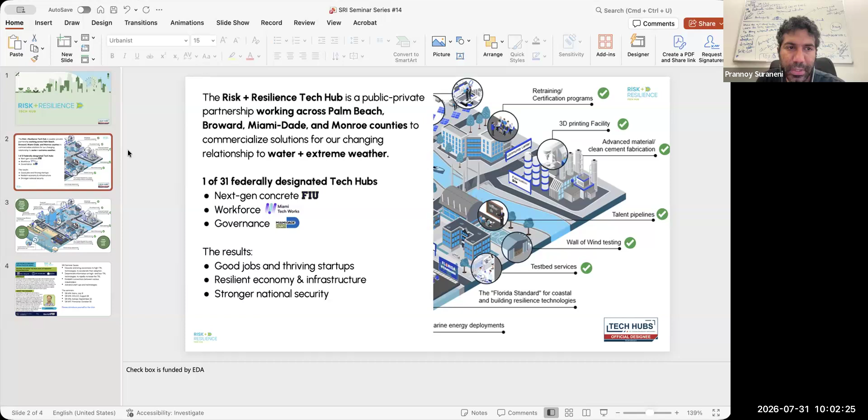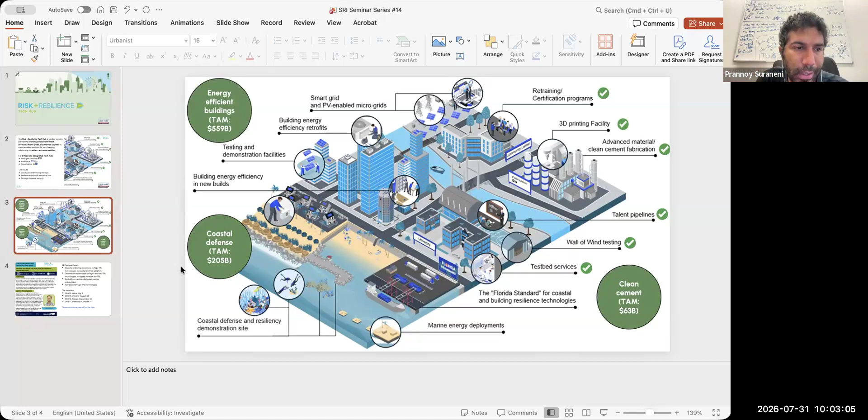While the majority of the research that is funded does focus on coastal defense and concrete materials, energy efficient buildings is also of interest. And ultimately, we aren't just interested in a few points here and there. We're interested in the entire water, offshore, inland picture, with a number of different things related to energy, workforce, 3D printing, novel concretes, clean concretes, and testing materials for hurricanes. All of those things are of interest in developing our technologies. What you're seeing here, the Sustainable and Resilient Infrastructure series, is just one small part of this entire piece.

The objective of this seminar series is really to make these connections happen. We want the startups to talk to companies, to industry, to VC, to government, etc. We want to educate and bring awareness to high TRL technologies to accelerate their adoption. We want to disseminate information on both high and low TRL technologies to increase the TRL. And we want to establish connections between the various stakeholders. That's the most important part of these connections that we will be establishing. Through that, we aim to advance the startups and technologies that are primarily in South Florida. And for those who are not in South Florida, we hope they will come to South Florida because of all the nice things that we are doing.

Today's talk is going to be given by Leonard Nelson from Natrx. The title is Inviting Water In, the New Logic of Resilient Infrastructure. I'm going to let him introduce himself, apart from saying that he's obviously extremely well established, well accomplished, and he's going to do a fantastic job.

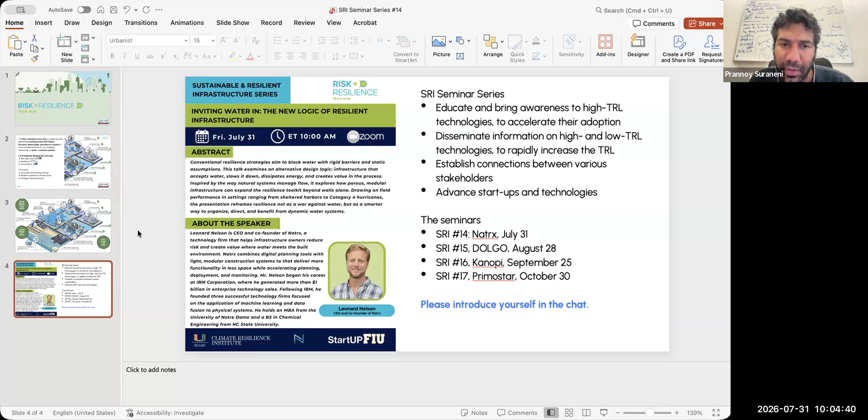Excellent. Well, Prannoy, thank you so much. And I wore the same shirt when I was getting ready this morning. I picked the same shirt as my bio photo, so truth in advertising there.

Really excited to just get a chance to get to know all of you. We're really excited to share a little bit about our journey, what we've learned in this field, dig into the problem, and talk about how we can use natural systems and technology to solve the problems that we have in the resilient space.

So I'll go ahead and share my screen. And speaking of technology, I'm going to try a new format here presenting. Can everybody see the screen? Yes, excellent. So just a quick snapshot of us before we jump in and get started. Let me minimize this screen here.

So Natrx, we provide technology. We help to activate projects and communities at the interface between the natural world and the built environment. We're very passionate about helping our clients achieve functional, economic, and environmental benefits at the places they work. The problems are pretty hard. It really is a daunting challenge to even define resilience in the first place and deliver solutions consistently. Doing more with less is kind of a theme in our world, so we'll talk a bit about that. And then we'll talk about how we can use technology to get smarter together as a community. So just a snapshot of our firm: we have about 20 employees.

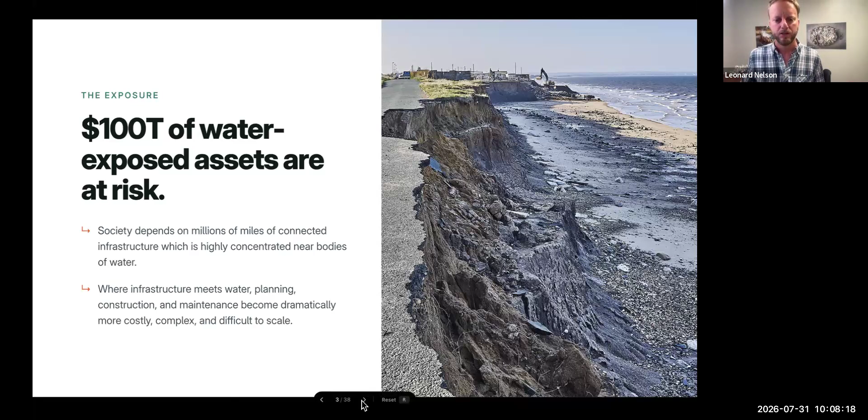And things kind of get very manual, get very slow, progress gets a lot more expensive. And unfortunately that is exactly the location where the consequences are the most extreme, right? Economic consequences, even loss of life. So these are major challenges that are really difficult to deal with. And we look at a number like 100 trillion, it's just a massive number. So how do we be smart about how to manage it?

So unfortunately, the way we build today is just not working. We use a lot of impervious techniques with bulk materials. That's 99% of what's being done out there. There's a few technology firms in this world, but most of what's happening at the water's edge is traditional construction - very costly, very labor intensive, oftentimes environmentally damaging. And what we're fundamentally trying to do oftentimes is block water out, which only speeds it up and sometimes makes those problems worse.

And when you look at the scale of infrastructure in the United States, there's at least 11 million linear miles of infrastructure that's directly exposed to the water. And cost for protecting, retrofitting, upfitting, building new is in the range - it always depends, of course - but it can be $50 million a mile or more. So it's a challenging place to work.

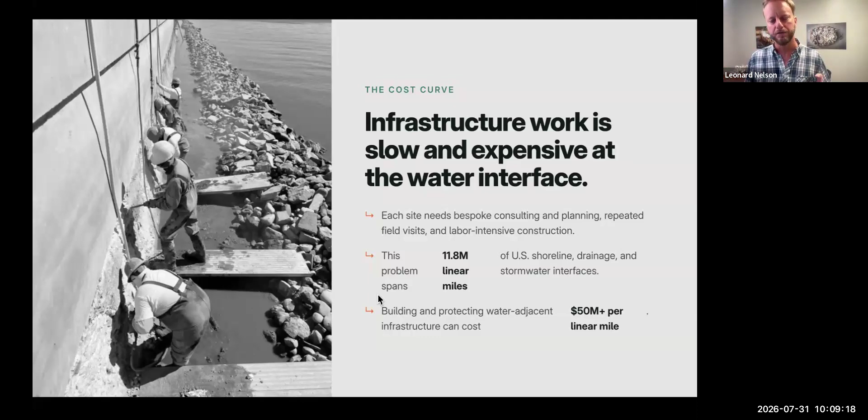Very, very manual today - a lot of manual design, a lot of manual bulk material manipulation. And so the flip side of that is there's a lot of opportunity to use technology to be smarter. So when you kind of look at it, who's our customer, whose problem is this?

That's another challenge in this world, in that it's actually a lot of people's problems, right? So you typically have an asset owner or a property owner. They have a lot of stakeholders. There may be other users on that property, particularly if it's public property. But even if it's private property, there's sometimes shared resources when you're touching the water. There's a policy, environmental, and regulatory angle. There's practitioners that need to be able to work in that area, work through those regulations, get things done.

And so really this is a shared challenge, a shared problem. At our firm, we look at our customer and who we serve as individuals that are trying to do more with less - those are typically the asset owners and the practitioners working together, incorporating input from stakeholders, the general public, and the environment. We're also trying to ride the wave of new technologies and new suppliers. Titan gave a great presentation, Eric Kohler, a few months ago. So there's a lot of materials innovation, but we can't bring those to practice unless we change a lot of other elements about how we build.

So, a kind of simple question about resilience that people often ask is, why don't you just put more stuff out there? Why don't we just build bigger?

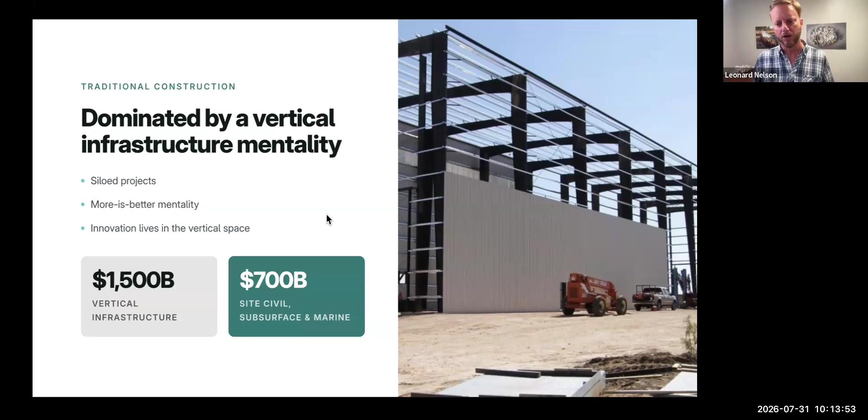But we're the little sibling here, and a lot of the ways things are done are based on how you build buildings, not how you deal with water, wind, or resilience threats—and unfortunately those resilience threats don't play by those rules.

There are also fundamental constraints in how we build and what we're able to do. Things are getting more expensive, not less. So there's almost always more work that needs to be done and more assets to protect than there is funding to do it. When you look at the labor market and supply chain, that's equally true.

That's twice as much as the entire cloud computing market in total revenues—Salesforce.com and every single one of the tens of thousands of software-as-a-service companies combined. We're spending twice that much as a society just to keep excavators operating every year.

40% of excavator drivers are going to retire in the next 10 years. And as we build data centers, we're not able to keep up with the demand for just excavators and those crews alone.

The same is true on the supply chain side. We've only built 2 to 3 cement plants in the last 10 to 15 years in the United States. We really need to be adding 2 a year just to keep pace with supply. We're not creating a lot of new mines, new materials in the plants, new quarries. We have a fundamental supply constraint on our supply chain, and that's driving costs up and making things more difficult to build with traditional materials.

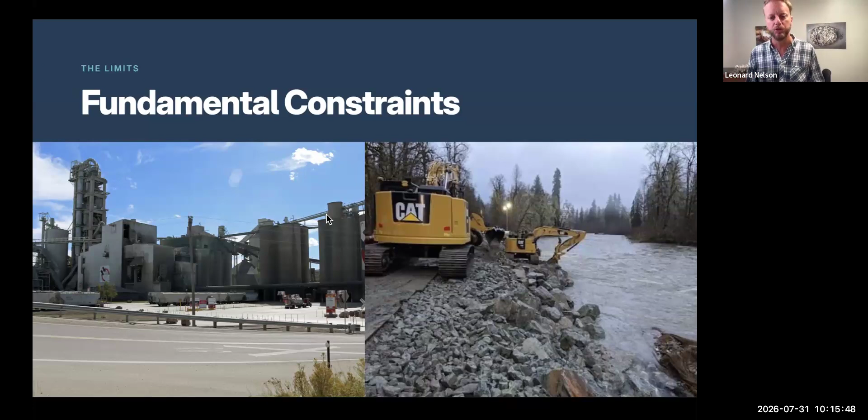So again, it begs the question: how do we do more with less? How do we get smarter?

Last thing I'll mention is innovation is not non-existent, but I think it's progressing slowly and it's relatively minimal in the subsurface domain, in the water resources domain. So there's a lot of opportunity to incorporate technology, incorporate that line of thinking. But it's also challenging, right? It's very difficult to introduce that. Part of that is because we all know in this space that our toolkit and the tools for the job...

...are a little bit too narrow, but the individual incentives, both for contractors and for project owners, really incentivize people to tend towards a traditional approach, right?

So there's a bit of a challenge here. We have a lot of empathy for the practitioners in the field that we work with, in that you're not going to get blamed if you go with a traditional approach. But if you go with something newer without doing the math and without doing the work, and if you can't justify it, that's a little bit more threatening, a little bit more scary.

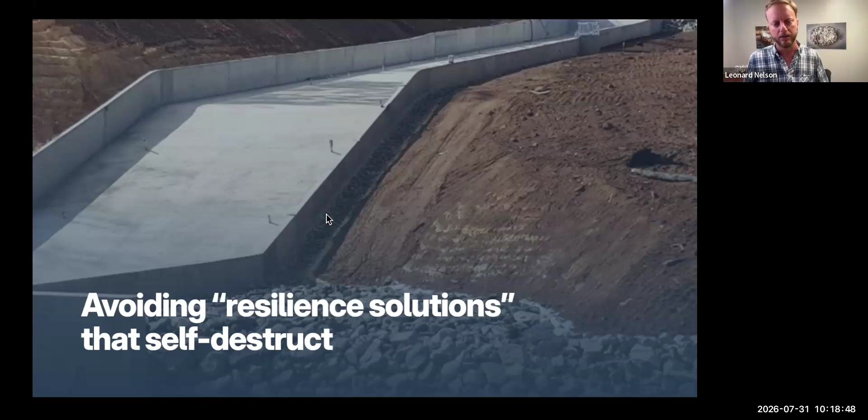As we learn and share together, we really need to think about ways that we can avoid solutions that are designed like this that self-destruct on their own and reduce in value over time, right? This is much more of a liability than it is an actual asset.

So how can we use technology and natural systems to help us build smarter? At Natrx, we believe it's really critical to take lessons from nature. Some people say nature is the world's greatest computer, right? The computational power of all the billions of natural organisms and systems interacting with water and with all types of resilience threats over hundreds of millions and billions of years is really unmatched by anything that humans have done.

When you look at how natural systems form in water-exposed areas, what you see is a lot of complexity. You see geometries that are irregular. You see situations where coral reefs, oyster reefs, the Amazon rainforest, water is allowed to flow, but it's slowed down.

We believe very strongly we can take lessons from nature, incorporate biomimicry to leapfrog what we've been doing since the 1900s, 1970s, the typical building methods we use today. How do we look at nature and then leapfrog what we're doing to get a factor of 10x better?

As you look at how nature manages water, it's very different than a wall. It's very different than something that's an impervious way of trying to block water out. It's distributing friction. There's voids and rugosity. It's a multi-species holistic habitat that also works with sediment, works with water.

It can build land. People often forget the entire coastal plain, everything from South Florida to, say, the entire—I live in North Carolina—everything east of Raleigh is built by these systems. There's no rock underneath the ground; it's built by the sedimentary plain. So this is oyster reefs and wetlands and trees working together to grab sediments, drop it in the ground, build off of it, and create very valuable real estate.

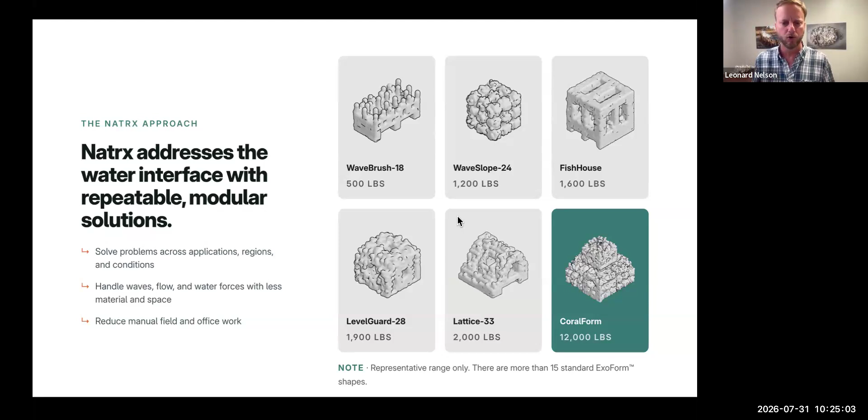So kind of the path forward, at Natrx, we strongly believe in modular solutions, moving away from bulk materials that are manually manipulated in the field to repeatable modular solutions. This is just a small snapshot of some of the different modules that we have, anywhere from 500 pounds to 12,000 pounds. We need to figure out ways that we can handle waves, flow, and water forces with less material and less space than rock or site cast concrete or precast concrete, avoiding smooth edges, finding ways to reduce water, and kind of move it from the regime of dangerous and destructive into a range where it creates value. And doing that while we're saving costs and reducing manual field work.

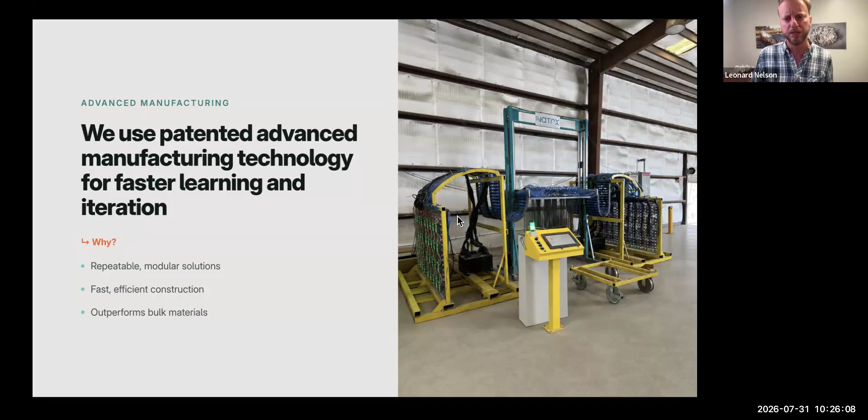Looking forward, we really want to make sure that we can move the inventory position of where and how we make these things closer and closer to the point of use. And so we're able to be a lot smarter about the supply chain to get people exactly what they want, where they need it, at the price that works for them for their budget. And again, these do a lot of things for the end user and the end user supply chain and existing contractor. So repeatable modular solutions, fast construction, less unit operations, that allows the end user to save money. It's less impact on the environment. And it helps people to move incrementally away from the bulk materials, which we use billions of tons of in the United States.

And then we have a software platform. So as we kind of move towards these modules, how do we help people to make these decisions? How do we use these new tools? How do you get started? Where do I start? What do I prioritize? What's my ROI for protecting something? What are the projects that I don't have to do this year that I might be able to avoid or defer? And what's my expected ROI for getting something done?

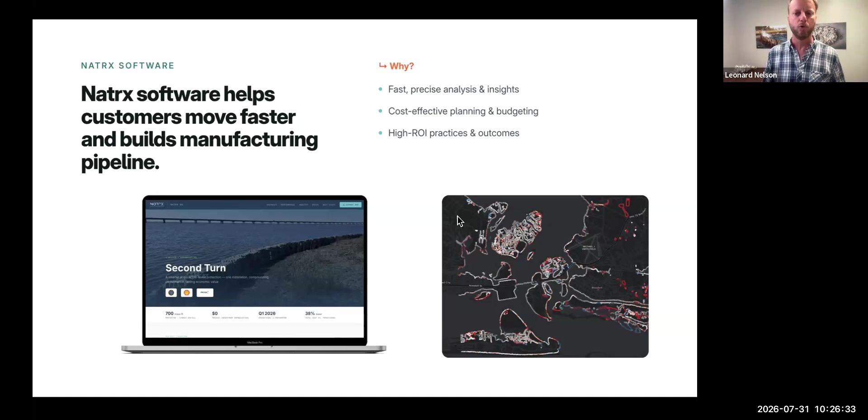And so kind of looking, I think, a little bit of a shift here towards iterating toward that optimal water interaction. So we shared that there's kind of ditches on two sides of the road. You can overprotect and overbuild, and that's generally, in our experience, what we see is that there's not enough funding to get things done, but oftentimes when funding is available, there's a lot of waste on the projects that do get done. There's a lot of overbuilding and there's a lot of incentives that kind of tend people towards that overbuilding tendency.

And so there's projects that are not being protected at all, very critical areas. They don't have the data to know that that should be prioritized potentially, or they don't have the funding. And then on the other side, there's areas where things are being overprotected or overbuilt. And the question is, how do we find that Goldilocks point towards the middle?

So we see projects where end users might do something like an oyster bag. Oyster bags are great techniques. A lot of us, including our team, got engaged in this world and got started by community-driven oyster bag projects. They can be great in the right environment, but we'll see customers put out oyster bags, they get blown away, blown to smithereens, and they go out and do it again. And so that's just simply too little to do the protective work that needs to be done for shoreline treatment, for example.

And then more commonly, you have something that's overbuilt, right? Heavy site civil where there's too much aggregate, too much material, and there's value destruction—even the upfront cost, the long-term liabilities, or the destruction of the resource itself. So finding that Goldilocks point is a real trick, and we believe we should be data-driven and data-informed as we make those decisions.

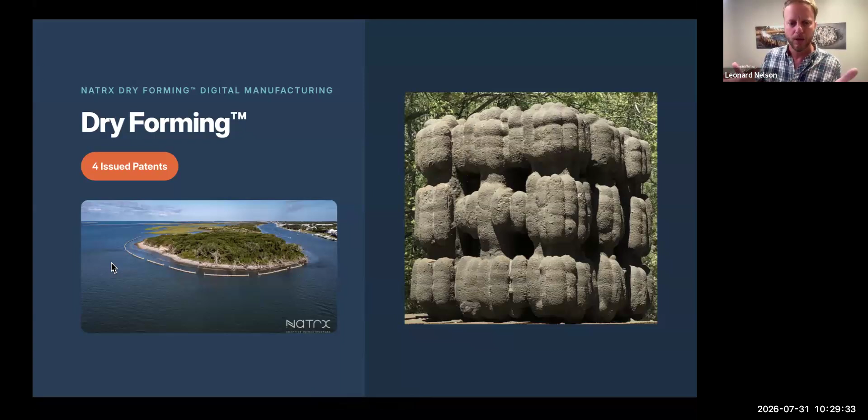On the left you can see Carrot Island, North Carolina. This is protecting a really important port and community, Morehead City, Beaufort. We're able to get that balance right—slowing the water down, slowing down that wave force, allowing the holistic natural system behind it, which has wild horses and all kinds of critical environmental systems. But that land mass and that sediment is really important to protect the town behind it. So we want smart geometries in place that allow storms and water to be exchanged in normal conditions. We want to slow that water down and let sediment drop and keep building up that island, like it's been building for thousands or millions of years.

We can actually put math to this. As we look at water speeds—and we'll talk about waves in a second—the value creation regime is really between 0 and 0.5 meters per second. If you can slow water down and invite it into your community, any waterfront property is going to have a lot higher value. It's enjoyable, there's all kinds of environmental benefits, and it adds to the economic base of the U.S. If you completely block it off, or your water's stagnant, you erode, reduce, or destroy a lot of the economic value you pay to live in that coastal zone for in the first place. So where you really want to be is where water's moving in this slow, value-creating regime.

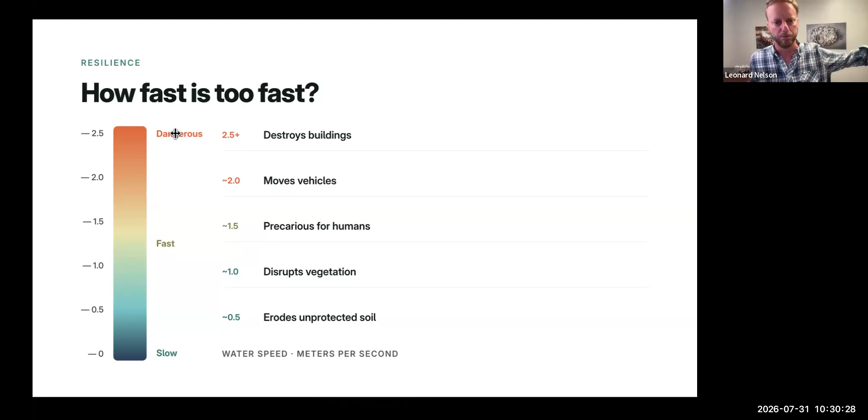As you move up, it's pretty surprising, but it doesn't take that much water flow to destroy a building, move a vehicle out of the way, get to where a human can't walk, or completely rip vegetation out. So we want to make sure we can use light systems that can move water down into that value creation range. This is a computational fluid dynamic model of the lattice.

We were able to model: if there's an asset protected by vegetation, or maybe there's a road, or a pipeline, some sort of infrastructure, we're able to use one lattice to move that current up and away from the asset. On the back side, we're able to model that you're down in that blue zone, where you have very slow-moving water, building sediment, building land.

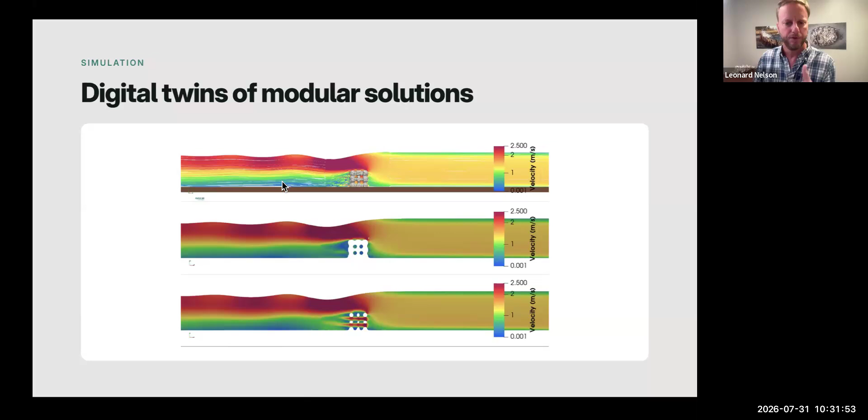By inviting the water in and changing the way it flows, we're using one-tenth less material than trying to build a giant wall. Number two, if that system does breach, we're not going to have a lot of scour and weak sediments around it—we're going to have a healthy, natural functioning system with lots of sediment behind it, encouraged by these modular flow control solutions. So this is a good example of doing the math and getting smart about what we're using. This allows our clients and their contractors to move past typical approaches—sandbags, 3-2-1 concrete bags, aggregates, block mattresses—cutting costs and giving them a better functional outcome.

The same goes for wind modeling. So as we look at wind, we want to look at wake-driven, or in this case, wind-driven waves.

We want to be able to model it. We want to be able to understand where the wind's coming from. We want to be able to get the right solution for that shoreline.

So we've developed geospatial technology that allows us to model the wind flow. We pull in NOAA wind gauges. We look at fetch 360 degrees. We look at all the storm history from the last 20 years. We're able to get it from a 360-degree standpoint.

Where's the wind coming from? Where is it intense? What's the frequency? What's the direction? Roughly how big of a structure do you need to actually solve the problem there? And then what's too big and what's too small?

So it's a prescription for a modular solution that allows you to avoid that tendency to overbuild, which might strain your budget, and also helps you to justify your investment so you're not in a situation where you're completely unprotected.

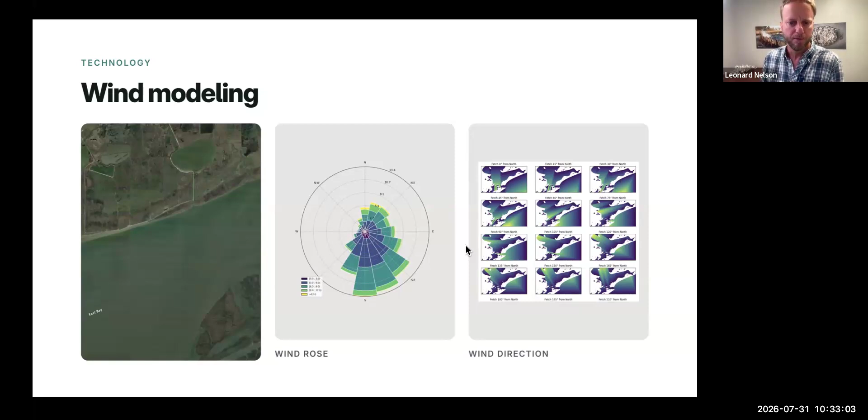And so again, from that wind model and from other mathematical parameters, we're able to model the waves. That gives you a very quick, very cost-effective, oftentimes in less than a week, prescription and a typical plan for what they need to do to protect a given mile of shoreline.

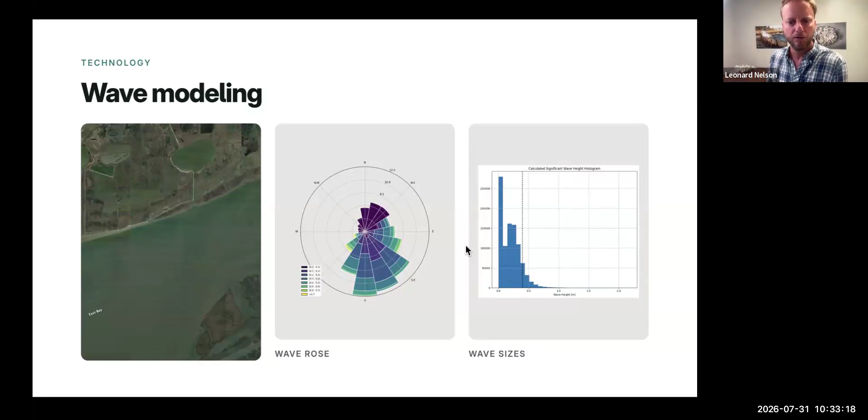And then once we do that, we're able to use our dry forming technology to produce modular shapes that we're able to solve these problems with. And to just kind of run through a couple of case studies really quick.

A major resilience challenge we have is that as water moves faster -- this is actually outside of Houston -- as Houston hardens and a lot more people move to Houston and move to Texas in general, the speed of the water in the riverine systems goes a lot faster. And a lot of buried infrastructure and subsurface infrastructure that was designed to have depth of cover, they're now getting blown out.

They're getting exposed and they're experiencing a lot of scour. So the traditional technique, as you see on the right, is to really either concrete over or block mattress the entire river bottom, so you're effectively hardening the entire body of water.

So there's obviously a lot of impact environmentally. There's also a lot of cost involved with that, a tremendous amount of material mobilization and labor. You're also speeding the water up. As you harden that water body, you're making it flow faster.

And again, those systems where you get a lot of fast flow tend to fail in catastrophic ways, or are often vulnerable to that. So you're moving from something that you've invested in, you've hardened it, but you may be less resilient in the end.

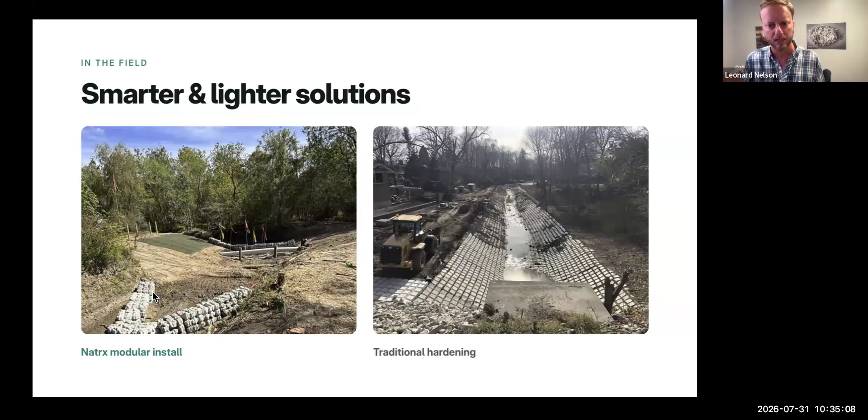We never touch the asset, we never touch the pipe, but we're able to protect it without even touching it, using the natural patterns of water. We keep the biological system completely intact. We're actually creating net positive habitat and structure as we do it. So that's a much better functional, economic, and environmental outcome.

Big advantage here. This is an example from that project: $8 million for the traditional approach versus $1.5 million for the Natrx modular solution.

Looking at the shoreline kind of modular approach as well. What you're looking at here is a flyover after a direct hit by Hurricane Laura. This was a Category 4 hurricane. By many measures, this is one of the strongest hurricanes to hit the United States in recorded history since we started taking records in the 1800s. Massive storm, direct hit.

And on the right side, you can see traditional rock breakwater. That's a bulk material driven, pretty costly solution. You can see the shoreline behind it is disrupted and eroded and blown up. The rock breakwaters themselves had to be repaired. The rock was scattered everywhere.

That was 10 tons per linear foot. The Natrx solution is 1.1 tons per linear foot, so 1/10 of the material. Not one of our modules moved. The shoreline itself was completely intact.

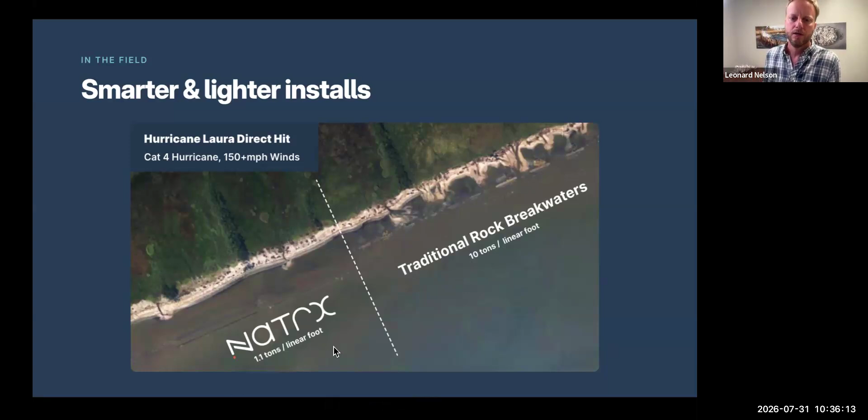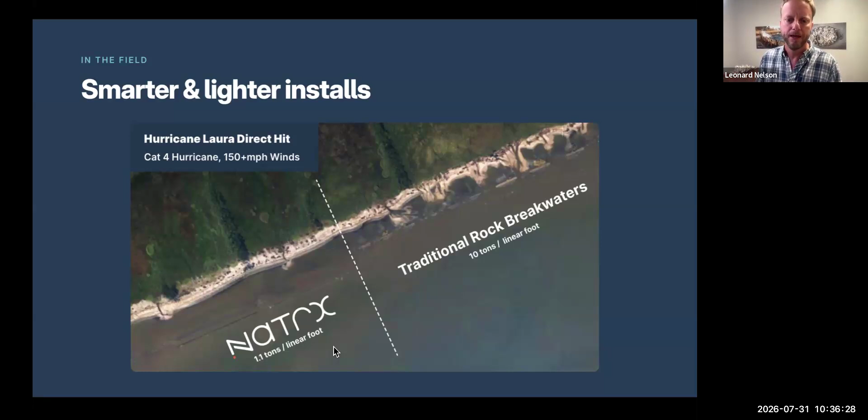So this is a better functioning holistic system, not just the module, but holistically overall. The wetlands are more healthy behind it. The shoreline's more intact. There's a better sandbar behind the structures that actually help to build it. And overall, it's a smarter, more functional system.

And so with that, the environmental side is fairly obvious, but just to touch on it, when we have a reduced footprint that's designed and inspired by nature, using a lot of the geometric cues we find from nature—voids, roughness, no flat surfaces, a good degree of water exchange—you inherently, with that geometric complexity and water interaction, build more biodiversity.

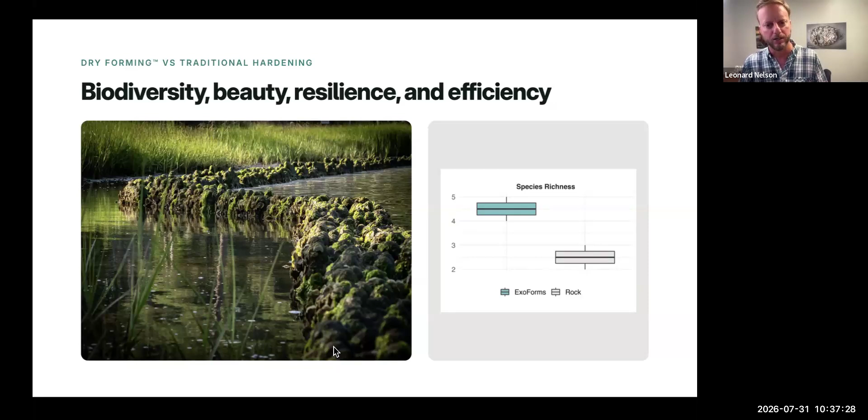We've had the chance to study and evaluate this with a variety of techniques. We're a big fan of using environmental DNA and a lot of quantitative monitoring to get snapshots of what's going on. With that additional complexity and water interaction, you're seeing increased species richness over more bulk material driven solutions that depend a lot on mined sand and mined aggregates, which can block nature out, block water out.

And again, that kind of destroys the natural resource you're trying to create. So one of my favorite project examples is a project up in the Middle Peninsula. This was an actual homeowner solution. We do a lot of work in heavy industry and public sector, but we also serve individual homeowners as well.

When we first started at this site, the shoreline was that wetland platform—you could reach your hand underneath the marsh platform. It was so undercut by the consistent erosion you could almost put your whole head and arms underneath the edge of the marsh platform. Because of all that erosion, it was smelly and mucky, with lots of stagnancy and mosquitoes, and it just smelled bad and looked bad.

So we did a lot of modeling and got the right size solution here. You can see from this drone footage that the SAV is lighting up, and the marsh platform is really healthy again. We've completely stopped the erosion. The property is beautiful—it's a much better place to experience.

So if you're a homeowner, you want to be able to experience that shoreline, fish it, play with the children, play with the grandkids, and enjoy it. If you use a rock solution that's 5 foot above mean high water, which some of the neighbors here have done, you can't even see the water from your property.

So we're really proud of a lot of these, not just from an environmental side, but the delivered functional benefit and the economic benefit that it delivers our clients. And so I wanted to quickly, in maybe 5 minutes here, show you some of the software that we're able to deploy to our clients in order to get started.

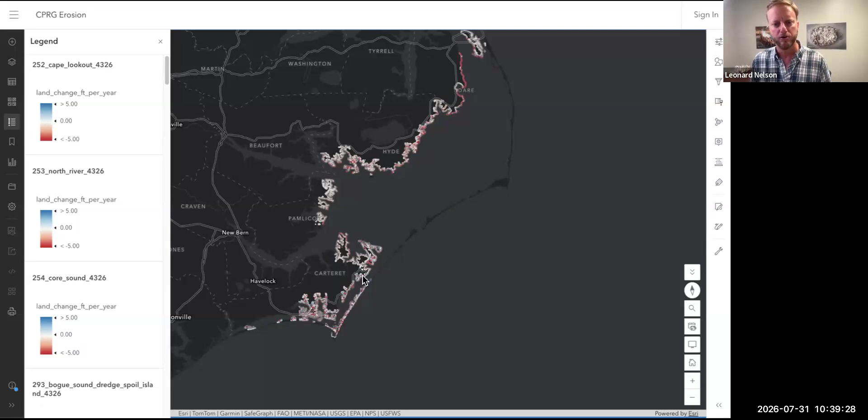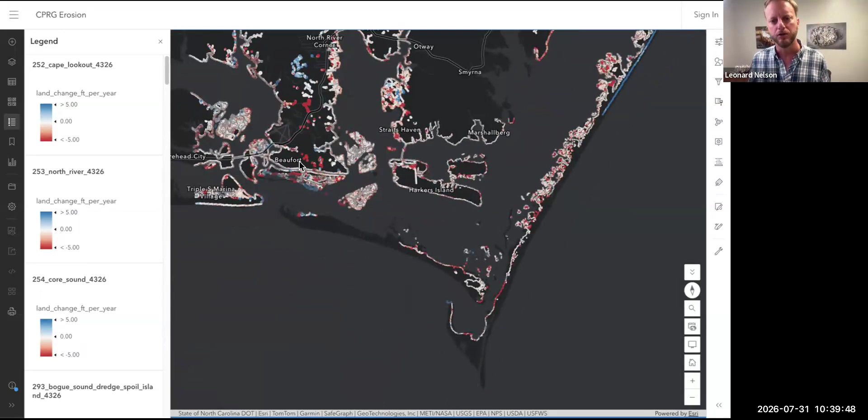If we're able to zoom in to, say, Morehead City, which is where that Carrot Island project is, a lot of our clients and practitioners don't know where they have these resilience risks. There's a port, there's all sorts of residential infrastructure, there's critical roads. If you're losing land near a major piece of infrastructure, like Highway 70 here, that's really critical—so you might be able to make a better decision to prioritize that up front with a nature-based solution.

Potentially you can solve that with something lightweight and modular for $500K, rather than waiting until you've lost the land, a hurricane hits it, and now the whole road caves out and you've got a $50 million solve. So using data is really helpful for making good decisions, getting ROI up front, prioritizing, and really using data to understand how you use your resources most effectively, how you stack up your projects, and how you get on a platform of rolling net positive ROI solutions.

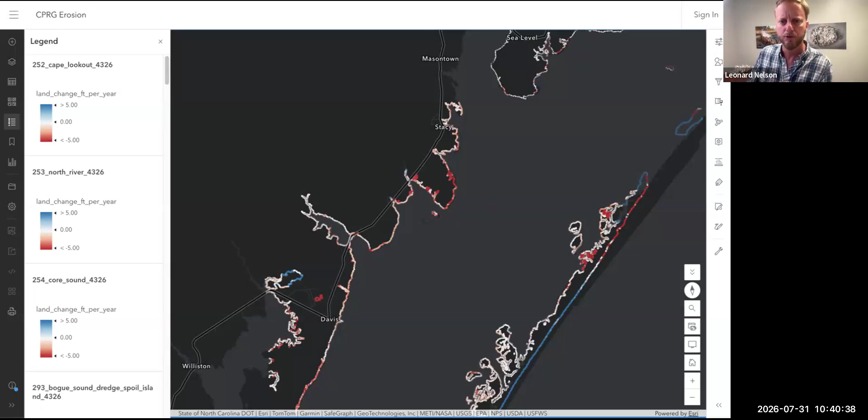Coral reefs are a major economic driver for Hawaii. We're pulling together academics, conservation groups, the State Department of Aquatic Resources, federal funding, and private sector entities, and pulling it all together. We're using data to tell the story and get better at how we deploy these things, working with various practitioners to share and open source the geometries we're doing, and how we're doing it, as we do it.